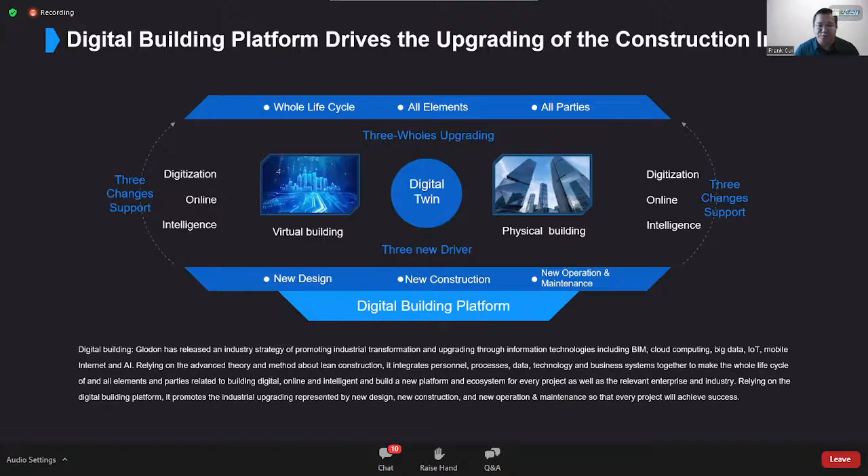And the obvious advantages that the digital building platform can bring to us, we think, are more income, higher speed, better quality, and less cost. Of course, there are also other benefits that we can explore by ourselves. Today, all sectors are talking about digital transformation, no matter if you are a big enterprise or small company. And we all know that digital transformation is inevitable for today's business.

The construction industry is one of the largest industries in the world, but it is still one of the least digitized sectors. We are constantly being considered laggards when it comes to technology adoption. Until today, some of us still insist on some old and very inefficient tools. So we can see the construction industry still has a long journey to digital transformation. What is digital transformation in your understanding?

I think it is the integration of digital technologies into all areas of our business. So it's fundamentally changing how you operate and deliver value to the customers. Of course, it is also a culture change that requires our organizations to continually challenge the current status of the team, to start experimenting, and to get more comfortable with new things and with failures.

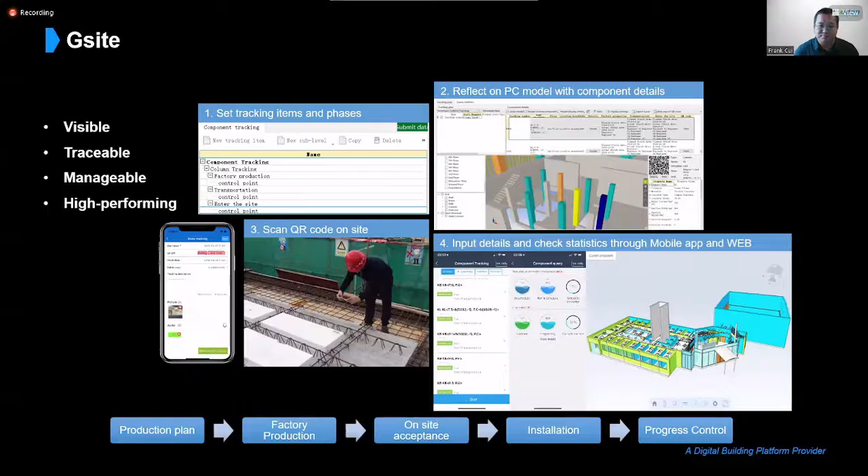And the digitalization is not only for the project modeling, but also for all the elements and activities at the project site, like the people, the machines, the material, the technology, the method, the environmental monitoring. So all the relevant data should be picked up and submitted to the platform. Then after we accumulate enough data, we can have better project coordination and big data analysis, finally to support our top decision making.

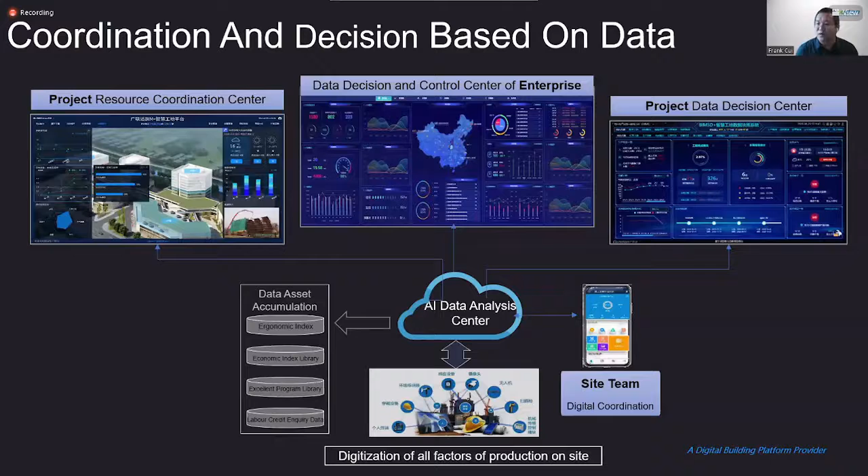In the last part, I want to say, whether we like it or not, technology is changing the construction industry very fast. No one can stop the trend. Our past performance doesn't guarantee our future success. We should stay young for shining things. We should stay young for new technologies. Time is a passage that can separate the adopters and those who won't. The future is not just for the young, but also for young minds. So I want to say, never be late to start or to learn. Never say we are too busy to learn new things.

So start your 5D BIM journey. Maybe it is one small step for our quantity surveyors, but it is really a giant step for our enterprise to stay on top in the fast market competition.

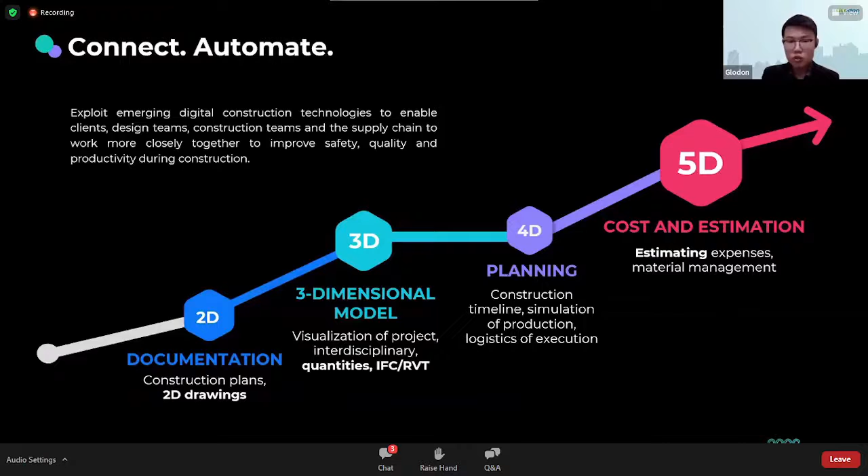So 5D BIM, digital cost management, is about three main things. First is about intelligence, second is about visualization, and third is about interconnection. From 2D to 3D to 4D and finally up to 5D, every stage has its own description. For example, 2D is mainly based on documentation, 3D is more on the three-dimensional model, 4D is planning, and 5D is about cost and estimation. So here in 5D BIM, we will introduce how our software can do costing and estimation.

Now, TAS is the leader of the 5D BIM quantity takeoff era, and its main calculation business is architectural and structure. For the past 10 years, it has been widely praised for its built-in local calculation rules, efficient modeling, and integration of quantity and model.

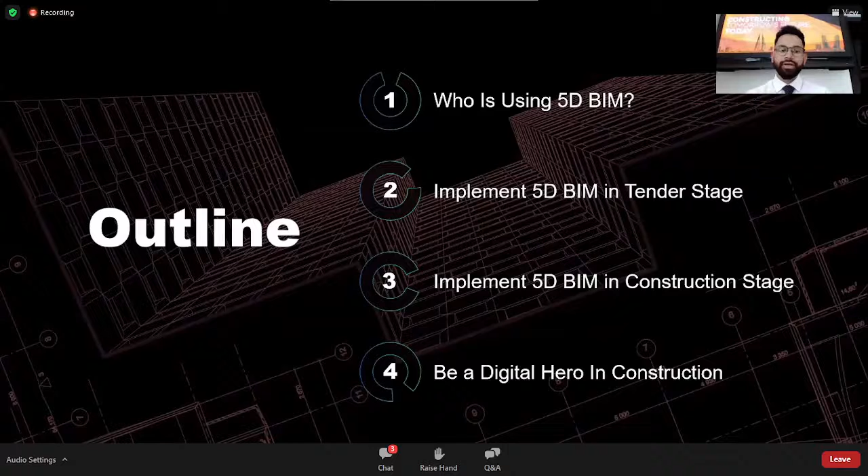So let me start with the objective, a quick rundown of the topics for today's webinar. Let's get started with 5D BIM. So who is using 5D BIM? That's the first topic for today. Then we're going to look at implementation of 5D BIM in tendering stages as well as in the construction stage. Finally, we'll conclude with your opportunity of getting involved and becoming a digital hero in construction.

With that, we move to the second topic for today: implementing 5D BIM in the tender stage. In general, we all seem to be reluctant up to a certain limit when it comes to technology, and we tend to find plenty of reasons for that. But when push comes to shove, we rush for changes. So it's time we identify the areas where disruption is needed and save time for a better outcome.

And then if we have a BIM model already, a Revit or an IFC file, it could be a federated or a single model, all we need to do is import the file, check the element properties, and then we can straightaway proceed to the quantities just by one click to do the calculation. Different types of quantity reports can be produced out of the software, which automatically applies the rules in it in order to generate the quantity reports.

Again, we are leading in the industry when it comes to collaboration and compatibility with different well-known file formats. Autodesk, being our R&D partner, paves the way for us to make sure our product is user-friendly and compatible. So we are certified by Building Smart, which is an international standardization body for Open BIM, and we support popular file formats like Revit BIM model and IFC BIM model, which stands for Industry Foundation Classes, from Building Smart.

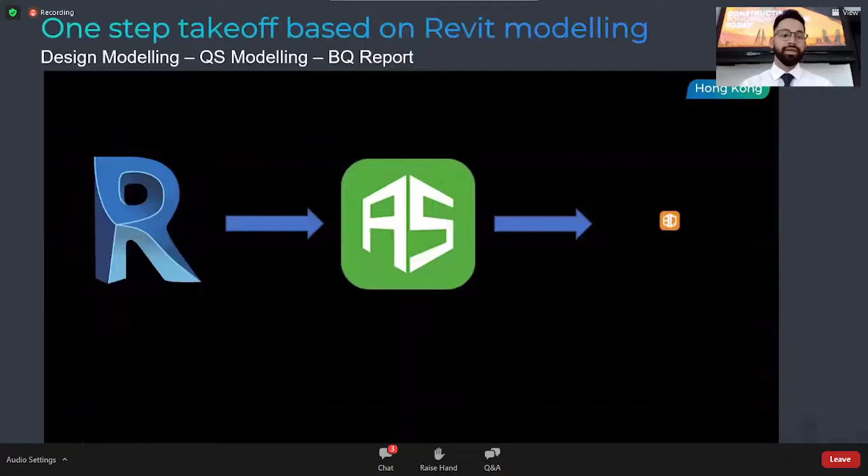non-proprietary file formats like IFC, where we need to ascertain which building elements are mapped for an export. So using a Revit design model, as you can see on the screen, our system provides you with not only the takeoff of all the elements, but also helps in live connecting quantities with the BOQ.

So the Revit model import is quite simple. All you need to do is just go to the BIM model and browse through the local directory and find out the model, and then set up the floor levels. Just make sure that the elements are getting imported with their respective properties. And then we just choose a location to place the model, just in case if you have different models, so you can place them at different locations based on the master plan.

And then we can proceed with having a look at different settings like grade settings. If you'd like to change, for instance, the concrete grade of a particular element, whether it's substructure or superstructure elements, you can do that. And then you can proceed with different other setups there.

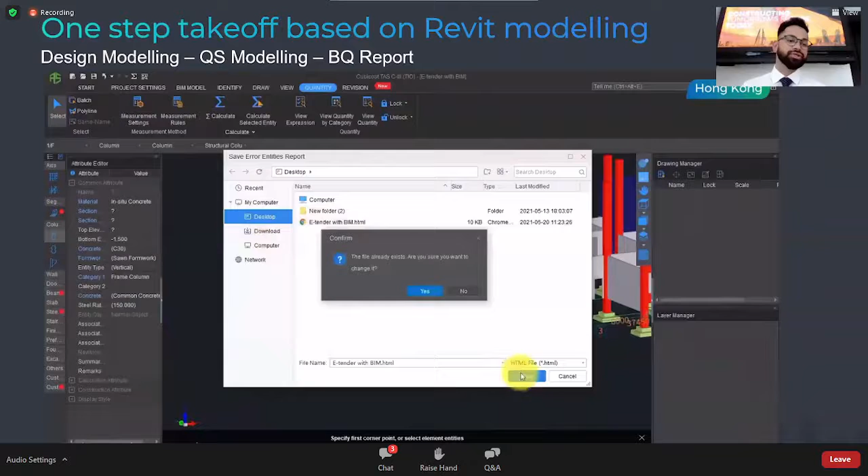When it comes to dealing with errors in a particular model, this is where everything gets interesting, because being a Revit modeler, you may have different kinds of errors with regards to overlapping. In that case, the software actually determines where those errors are and allows you to trim out the extra areas. From the model check result, we can see there are different errors with regards to overlapping or extensions. The software has a powerful function called auto process, by which it trims out the extra layer, and again it asks your permission if you'd like to do that or not. You can set different setups there.

And then we have the quantities right here after doing the calculation. Now, once we have the quantities ready with us, then it's about live linking these quantities with our BOQ. The BOQ is inside a software called TBQ, which is a tender estimation and pricing software.

In TBQ, you can have a built-up BOQ already, or you can import a BOQ, whether it's in Excel or PDF, a scanned PDF. Then, because both the takeoff software and the estimation software are connected together, all you need to do is feed the quantity information to the respective bill item. You can have a reflection of the actual BOQ from TBQ to the takeoff software, as we can see on the screen. And then we can just drag and drop the quantities from the model to the BOQ.

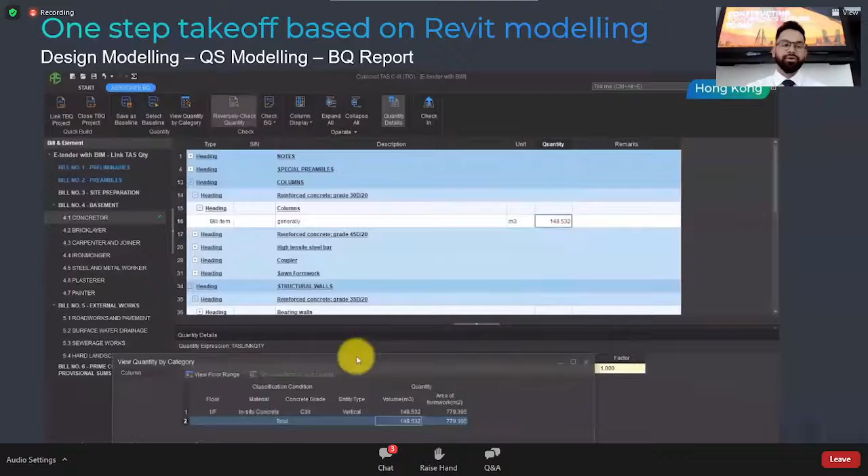As soon as we do that, there's a function for check-in and check-out, which would basically send this information to our estimation software. And if you'd like to apply any factor to any of these quantities to increase the quantity, you can do that. There's a powerful function which is reversely checked, as we saw before. From the BOQ itself, you'll be able to see where exactly the quantities are coming from in the model.

So now that we have the quantities fed into the BOQ, if we switch to our estimation software TBQ and look at the quantities with the details, we can see who as a QS attached that quantity to that bill item and at what time, with every kind of detail. It also shows with a sign that the quantities came from the takeoff software, which is for architecture and structure.

We can also do manual quick calculations and feed them into different bill items, just in case there are some bill items where we have to do manual calculations. We can apply formulas and different functions, just like in Excel, and do some manual typing as well if you'd like to add up some quantities in a particular bill item. All these functions are available, and it's quite flexible when it comes to edits and modifications.

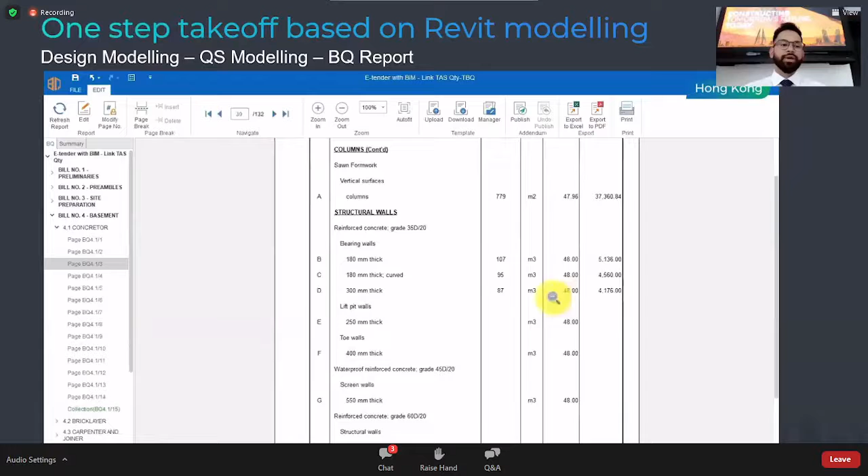And then we get to the actual BOQ preview, where we see that all the quantities we just fed in are actually getting reflected into the actual report. We can put a logo on top if we are a consultant, and provide details into the header and footer, page numbering, and other settings. Finally, when we have the BOQ ready, if we are a contractor, we feed in the rate and the amount is already there, and then we can print directly from here. So now we have the PDF BOQ with all the details in it.

That's from Glodon CubiCost, the whole system of how we connect the quantities with the BOQ and live link both of them. Because the model is connected with the BOQ, when we make any changes in the model, that gets reflected into the BOQ automatically. So that's automated.

All right, so 3D modeling from scan PDF or JPEG file. Inside our CubiCost TAS software, we can quickly create a project and select our rules of measurements. Just by pressing OK, we have created a new project.

First, if you look at the measurement settings and measurement rules, different rules are already built into the software, coming from the method of measurement chosen while initiating the project. Under floor settings, we can set up different levels of a particular building and the grade settings we looked at before.

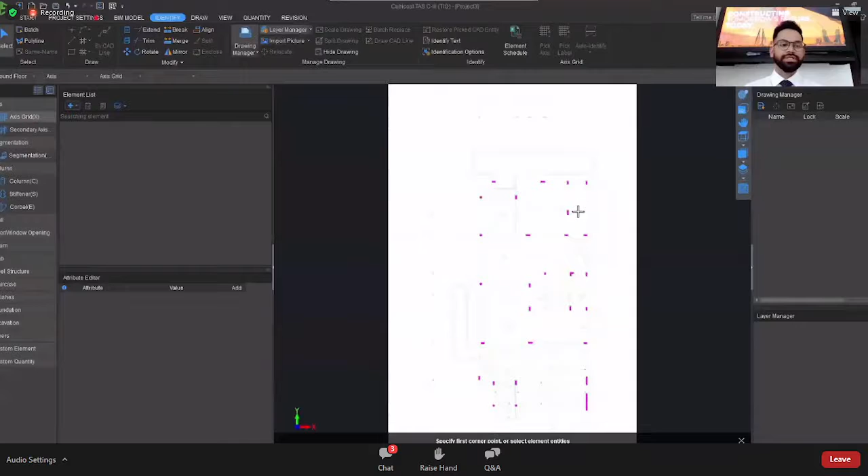Now, if you proceed with any of the file formats mentioned, it could be a picture file or a picture drawing. So if we've imported a JPEG drawing, what we tend to do is scale the drawing first, because for the most part it's not scaled. The scaling process is quite simple.

It's just the same as any other CAD software in the market. If you proceed with the correct scale, then the drawing is pretty much set for building up the BIM model and proceeding with the calculation.

So next, we're going to go ahead with one particular element. Let's say we're just concentrating on column. In this scenario, because we have a picture, not really a good quality picture - bad quality, let's say - of the drawing...

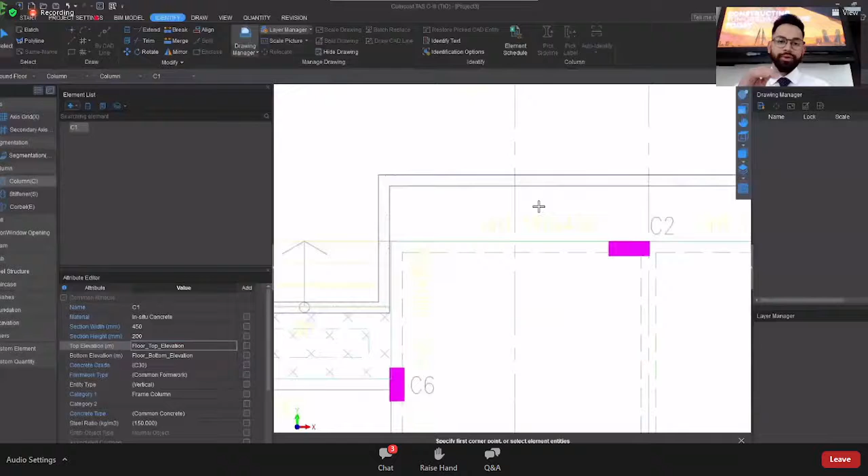What we tend to do is create a particular type of column, let's say C1, and start placing them in their respective positions on the drawing. There are different functions to snap that particular location as well - you can snap the point where the column needs to be placed.

Just to save time, we actually placed the other columns already. So if we proceed with the next element, beam, we can do the same.

We just create a beam, provide some information like its width and height, and then we can directly start placing the beam in its position. It's as simple as dragging that point from the beam from one point to another point, and it just got placed.

So all you need to do is create those types of beams and place them in their respective position. By the way, while we are doing the modeling, in the background the software is making sure all the calculations are getting applied.

So if you press calculate, the calculation result would pop up and be available. To save time, we also did this slab quickly, and here we can see that all the elements of beam, slab, and columns are in place.

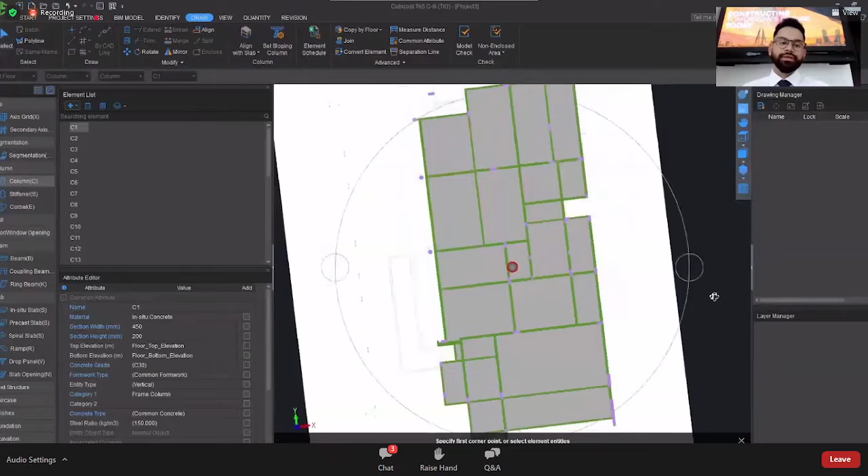So next, we're going to run the quick copy floors function. By doing so, we can copy those floors, which saves a lot of time because for the most part, the structural elements are more or less the same on different floors, except for size changes.

If you'd like to make changes, you can switch to the next floor and make changes there. That's quite user friendly and easier.

Here we can see that on our working space, we don't have any drawing yet. So we're going to import some drawings from our browse directory, and then we have these floor plans here. We're going to let the software do an auto identification of elements from the 2D drawing and build up the BIM model for us. We just split the part of the drawing that we'd like to use for the first BIM modeling.

We can split out the drawings as many times as we want, depending on which part of the drawing we are using, or depending on the floors that we are working at. And then the function of auto identification is right here. So all we need to do is just perform 3 simple steps.

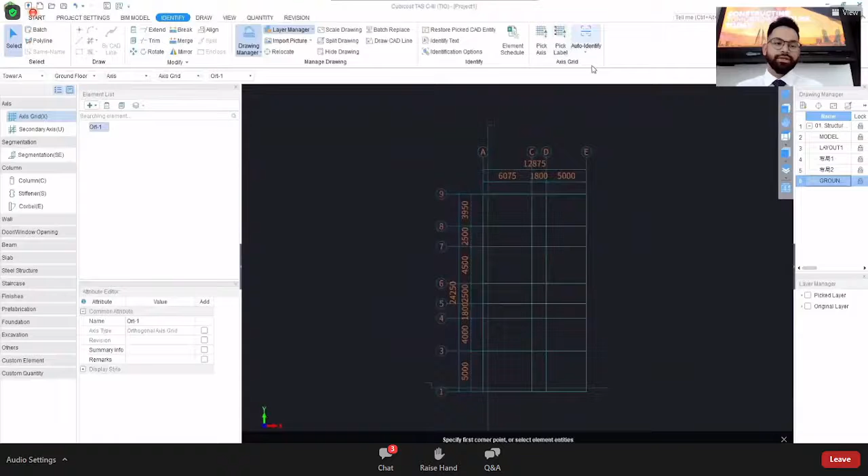We pick the sideline of the particular element that we are identifying. So here, for instance, we are identifying the axis grid. So we just picked up the axis grid and the level of axis grid, and by the auto identification function, here is our axis grid in place. So by 3 simple steps, we can generate any of the elements that we want.

For instance, here, if we just proceed with one of the structural elements like column identification, we're gonna have a look at how the software automatically identifies the 2D lines and builds up the 3D model for us and does the calculations for us as well. So over here, we can see that there are different functions, but 3 particular functions that we'll be using just like before.

So you're gonna go ahead and select the column, and then we proceed with the first step, which is picking up the sideline of the column. Then we proceed with the next step, which is picking up the tags or levels of those columns, and then proceed to the third step, which is just auto identify. Now, what happened along with this process is that the software identified the 2D lines and built up the 3D model from there.

So these are the columns in place, as we can see. So from the 2D drawing, whether it's a CAD drawing or a vector PDF drawing, the software would identify those 2D lines and build up the 3D model for us for any kind of elements. So now that we have our column, if we proceed to a couple more elements like beam and slab, it's just the same 3 simple steps.

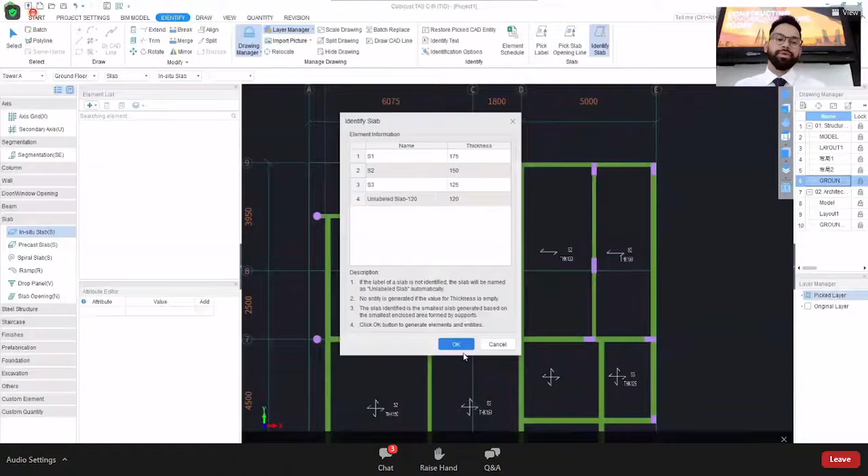And for slab, you have the option of selecting a particular type of slab that you would like to place, or you can make changes with respect to their names or their thicknesses. So over here we can see that these are the thicknesses that can be changed, or we can proceed with. So we have the column, we have the beam, we have the slab in place at the moment. All right, so that's pretty much the 3 structural elements that we just looked at.

Now if we proceed to the wall for an architectural element, we can again perform the 3 simple steps, picking up the sideline of whether it's a masonry wall or a concrete wall. So we are proceeding with the masonry wall sideline. We don't have a label for that, but we picked up the doors and windows for walls to make sure that the software knows where the openings are. And then we proceeded with auto identification. And look what happened. We have the wall in place now. So this is the 3D view of our wall.

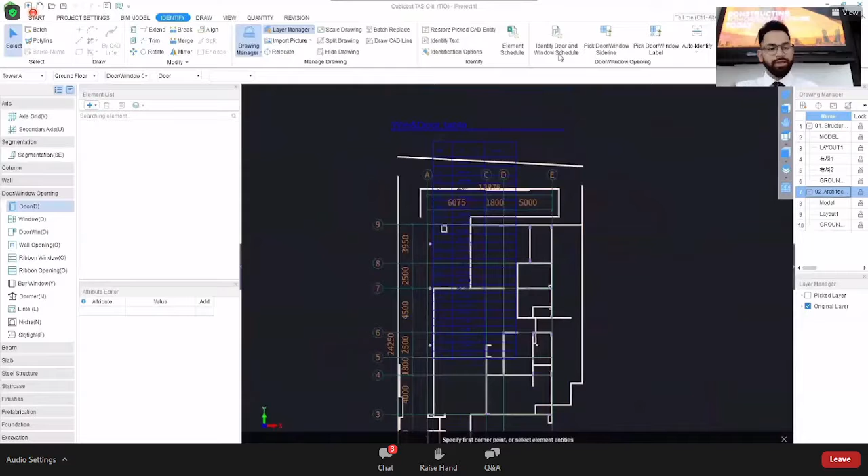Now, if you go for some openings on the wall, for instance, the door, this software again pulls in information from an Excel file, from a PDF file, a schedule of doors and windows, or from the CAD drawing itself, if you have a schedule inside of the CAD drawing. So here we just picked up a schedule of doors and windows from the CAD drawing, and the software is pulling in all this information, providing the headings that we have selected, or it automatically identified. And now we can see the identification is done.

Just in 2 simple steps, we have all the doors and windows listed with their respective sizes and properties from the schedule. Now all we need to do is just identify the levels of those doors and windows, so the software knows their position from our previous step. Now, if you proceed with auto identification, the software identifies those openings of doors and windows and places them in their position with their respective sizes.

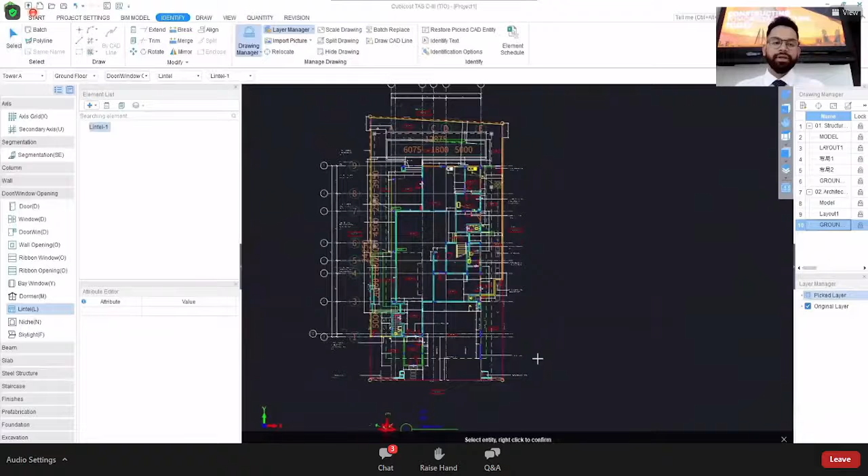Really, really powerful tool. And then if we go ahead with structural elements like lintel, there is quite an intelligent function of auto identification, which automatically places the lintels in their respective positions. Let's have a look at that. So we proceed with some properties like width and length and the extension that you want on each side of the lintel. And then all we need to do is just select the entire drawing and right click for confirmation for that particular set of conditions.

And the software would place that particular lintel that we created on the top of all the openings out there. So it is a matter of just selecting the drawing and pressing OK.

So we will just proceed with the basic functions, which are like providing information related to the riser and tread, and the thickness of landing and width of landing. And then the software knows how the model should look like. All you need to do is just trace the positions of the steps by simple clicks, and the software is going to place the steps in their respective position.

But what's interesting to look at is the software actually creates the landing automatically. The shape of the landing and how far it should cover depends on the properties that you have provided before. But the mid landing and the floor landing are being created by the software. So it's really, really intelligent function there.

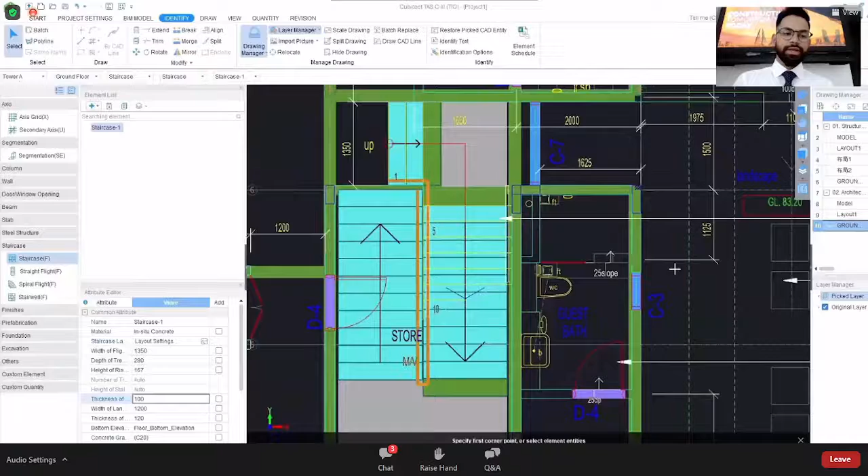And once you're done with that, you can actually edit that particular staircase if you'd like to have some sort of shape on the corner. And if you'd like to change some of these elements' shape, like if you'd like to provide some more railings as an example. So we just select, okay, we would like to have railings on all the sides. If you'd like to get rid of the beams or change the size of beams, all this information is available inside of that function.

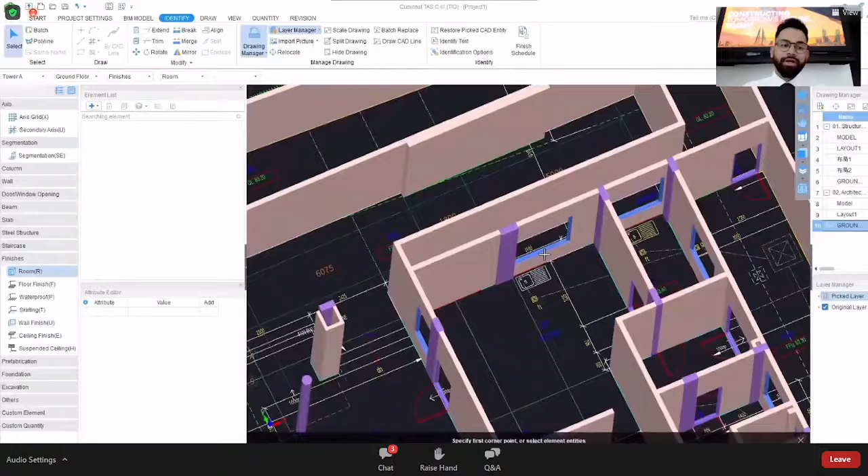Now, if we proceed with the finishes, we go to our different rooms, and there is this particular function in the software where we have just selected the room. What the software does is that it takes care of every kind of finishes that should be applied to a particular room. So now, all you need to do is, for a particular room, you assign the wall finishes, you assign the skirting, you assign the floor finishes, the ceiling, and it takes care of all the edges in the corner of, let's say, the beam or column, which is coming along with wall. If there's a wall opening, the software would consider that and deduct that area in terms of the wall finishes.

Now, in this particular case, we're going to import a schedule of finishes. If you have it in Excel, if you have it in CAD or in PDF, we can deal with every kind of format. So now you can go ahead and just select that particular file of schedule of finishes. Now we are using here an Excel file. And as you can see, on the top we have the heading. So we tend to get rid of some of those.

You can delete the row, you can delete the column if they are not useful. And then you just have to make sure that all the finishes are in place with respect to their heading, so the software knows exactly which finishes are getting imported. Now, if you press identify, the software identifies all the finishes with their respective rooms. So you can see that different rooms got imported, and with their rooms on the right side, we can see that the attached finishes are also there. So these all attached finishes got imported from the Excel schedule of finishes that we have.

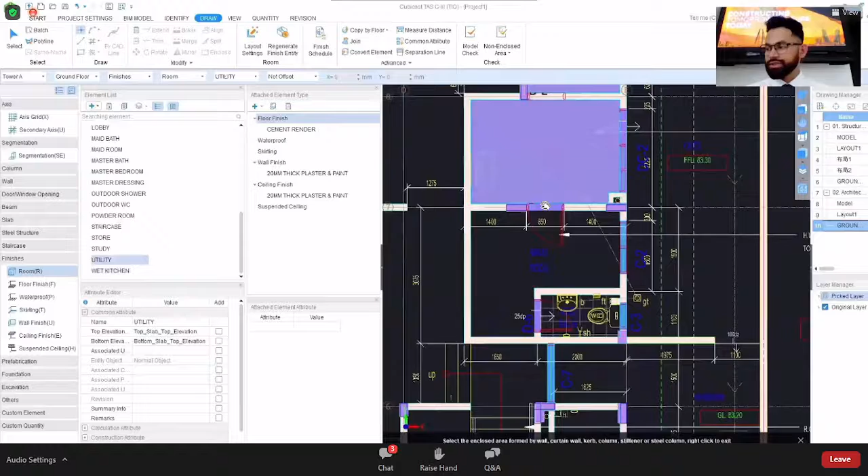Now it's a matter of just clicking on different rooms to apply those finishes. Just in one click, the software is going to place all of these finishes for a particular room in that particular room. So let's have a look. So we just click here, and that is it. It's been applied there. Now, if we go to the next room, we just switch to the next room, which is our maid room. We then go to maid room, place it there. We have then maid toilet, so we're going to go ahead and do that as well.

Now, if we turn it into 3D view, what to see and check is the placement of those finishes, and you can see that the wall finishes considered all the sides and edges and openings, and then you have the skirting right there, and then you have the floor finishes.

Now, let's have a look at a non-enclosed area. The previous function was applicable for the enclosed area, which is enclosed by a wall. But if you have a non-enclosed area and you try to apply the finishes, you can see that it goes beyond the line that you want. Let's say we just want to apply finishes for this particular room.

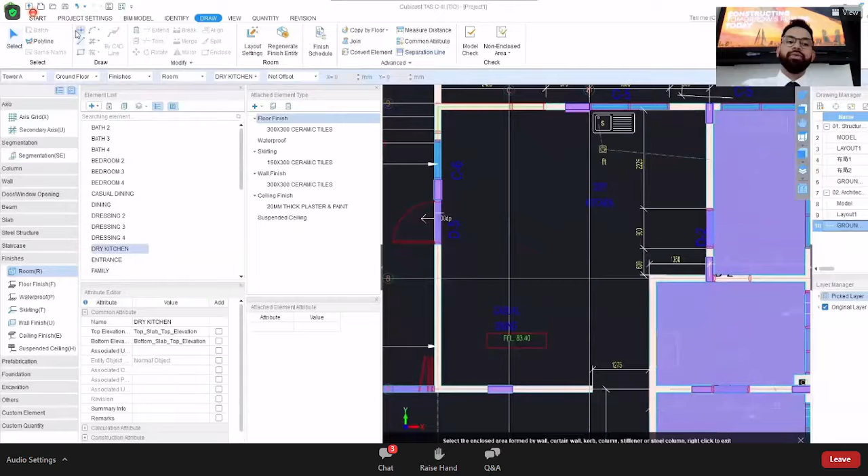So there is a really, really useful tool, which is separation line. What it does is that it creates an invisible boundary, which doesn't have any quantity in it, but it makes sure that the areas are separated now. So we can apply a particular set of, or just one type of finishes in one particular area, and then we can apply another set of finishes on another side.

As you can see, I just applied for this particular area, the dry kitchen, and you can see that this is the result. But for this area, we're going to go ahead and place another type of finishes as an example. So this is how we can actually separate our finishes. We can place different finishes at different positions. And more so, we can actually deal with different shapes and sizes. We can split those items and create different other shapes as well.

Okay, so now let's have a look at the collaboration when it comes to modeling. Now, we're going to have a look at how to copy entities to different areas and different floors. If you'd like to copy some of these elements to different locations, providing that two buildings are similar, how are we going to do that? Or if you would like to just place it in the opposite direction, how do we deal with all of these rotate functions and copy functions in the 3D model?

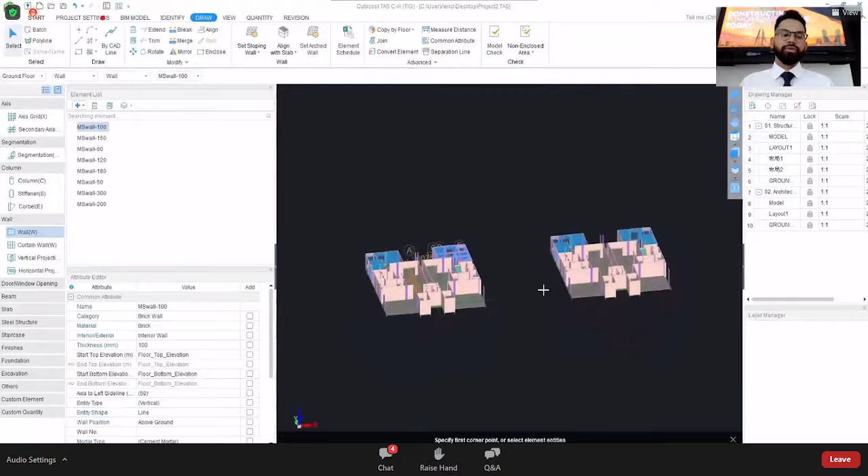So you can directly copy and paste the elements, all of them, to another part. And this is how we copy the entities of this particular model. And then if you would like to copy it into another place also, it's all about just copy and paste. And then you have the ground floor, looks quite a huge building, two buildings right next to each other of the same shape, just by copying these elements from one place to another.

Now what we're gonna do is copy all the elements of this particular floor, the ground floor, to different other floors. In this particular example, we're just considering that these floors are typical floors. So what the software is doing is basically copying all the elements that we have modeled so far on ground floor to all other floors that we have. But as I mentioned before, we can switch to different other floors and make changes as required.

If we just look at the whole building, just to have a 3D view of it, you can see that all these works can be done very quickly if you have typical floors. But even if you have different other shapes or sizes, you can make changes by switching different floors. All right, so we looked at the modeling part.

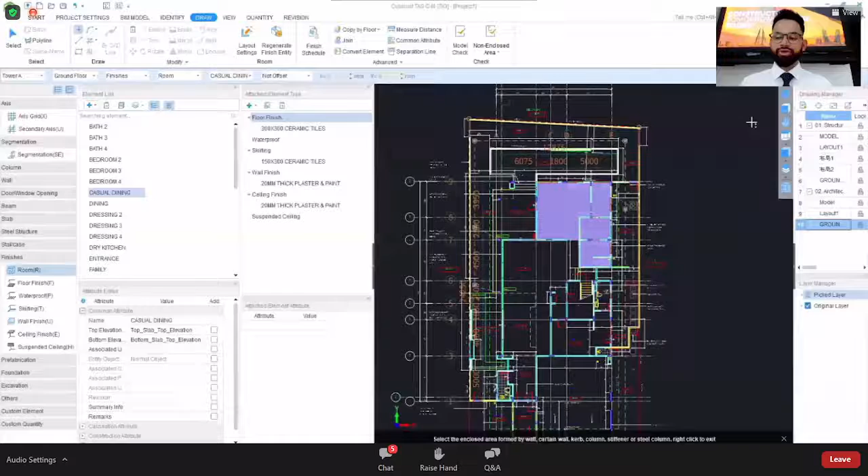Now let's proceed with the quantification of different elements and how we extract the quantities and produce some reports out of it. Before we move to the quantities and reports, we have to proceed with calculations. So we're going to do the calculations very quickly. How it works is that it basically follows the same principle as I mentioned before. Depending on the measurement settings, the software is going to calculate and apply those rules with regards to which quantity supersedes which when it comes to deductions, for instance.

So over here, if you just press calculate, the software would calculate, whether you'd like to do the calculation for a floor or the whole building. You can get it done. And then we have the quantity view option, which is view quantity by category. Over here, we can see a complete set of customizable catalogs available on the left side, which allows us to categorize quantities with different conditions, different filter options, division, etc. Selecting the conditions or calculations that we want, we can directly export it into Excel. As we can see, the function is available there.

Then when it comes to looking through all of these different quantities, as an example, in a particular case, if you did the calculation, then you're going through the quantities, and it's a little bit trickier to understand which quantity is exactly from where.

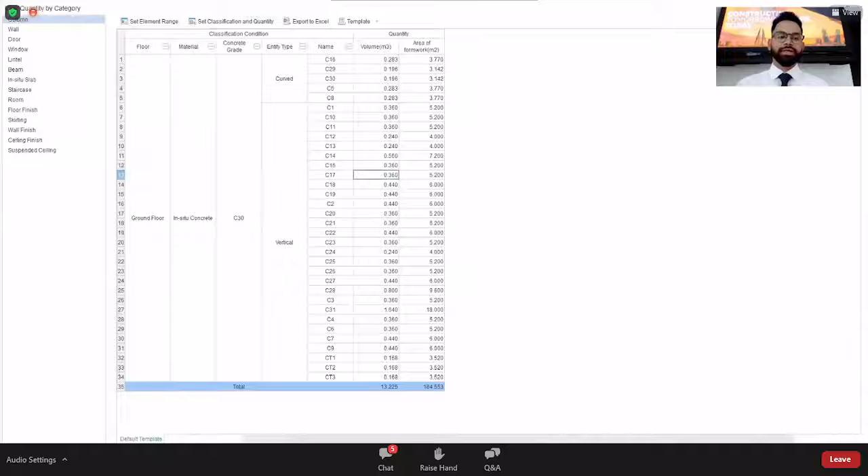So there is a really useful tool available, which is the reversely check function. What it does is that you just select a quantity and press reversely check, and it takes you back to the model and shows you exactly where that particular quantity came from. Let's say we selected another column quantity here, press reversely check, and here it is.

And then we have another function to check the calculation result, or how the calculation took place inside of the software. That is the view expression function, which breaks it down to the calculation of length, area, volume with various details and their numerical values. So you can actually see every detail of the calculation that happened inside of the software. And if you'd like to make any kind of changes, you are always free to do that by going back to the measurement settings and changing the settings.

Now, if you select a wall, what's interesting to notice here is that it not only gives you the breakdown of the calculation, but also allows you to have a visual confirmation of the calculation that is happening. It's useful for documentation or visual presentation purposes.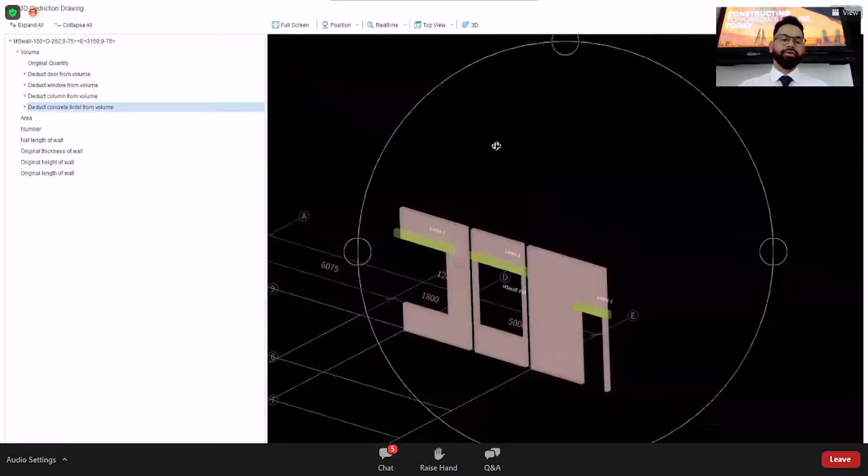At this point, you can see that this is the whole quantity of wall. There's a deduction for doors, deductions for windows, and there are deductions for lintels as well. So by all of these deductions, the software arrived at a point where it calculated quantities for just this shape. And these are the quantities that we just saw inside of our report.

All right, so this slide in particular looks at a complete interconnected quantity takeoff and cost estimation platform provided by CubiCost. To get an overview of how the complete system works, we can see on the left side three takeoff tools: TAS, which stands for takeoff architecture and structure; TRB, which is for rebar, which is what we're going to look at now; and TME, which is for MEP, which we will look at in a while. These tools do the quantification using the BIM model, as we saw, and then produce the quantities.

And what we tend to do is connect both the estimation and takeoff software together in order to produce the BIM costing part, which is again connected to the e-tender platform. Tendering, evaluation, receiving tenders, doing comparison, finalizing bids, and all of these different activities can be done in the e-tender platform, which is connected with the BOQ of CubiCost.

Okay, so let's proceed with TRB, which stands for takeoff for rebar. Over here, we will be looking at 3D modeling, which can be shared between TAS and TRB. In other words, the model that we have just built up in TAS, we're going to use in TRB. On the screen, we are looking at the TAS software. We have built up this BIM model. We can export the model, and there is a native format within CubiCost called Qubit format, by which the software allows you to share the model within the CubiCost suite: TAS, TRB or TME.

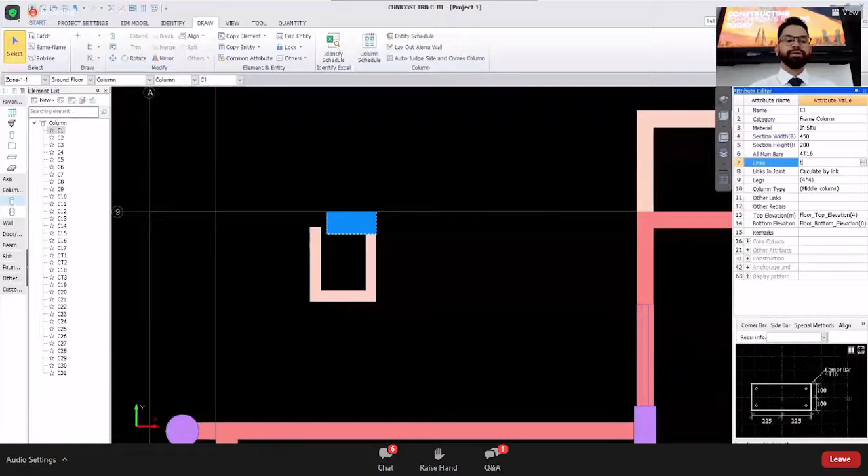All we need to do is select the type of column, let's see C1 as an example here. You can simply manually put in the main bar information, the stirrups information, and if there are links, all of these different bar information can be directly input in the properties, and just run the calculation and get the result. And you can see the visual representation of the rebar and how they are arranged for a particular element. So we did that for one column.

In many cases, you have the same type of rebar information for different columns. So there is a function for synchronization as well. You can synchronize the same information over to different other columns as well. Now, if we proceed with beam, there are different approaches available within the software, including the manual one.

But then we have a really, really short method, which is the beam rebar information schedule. If we have that schedule, then we import that particular schedule, and the software would identify all this information. In other words, it will pull in that information from the schedule. The schedule could be in CAD format or in Excel format, as I mentioned before.

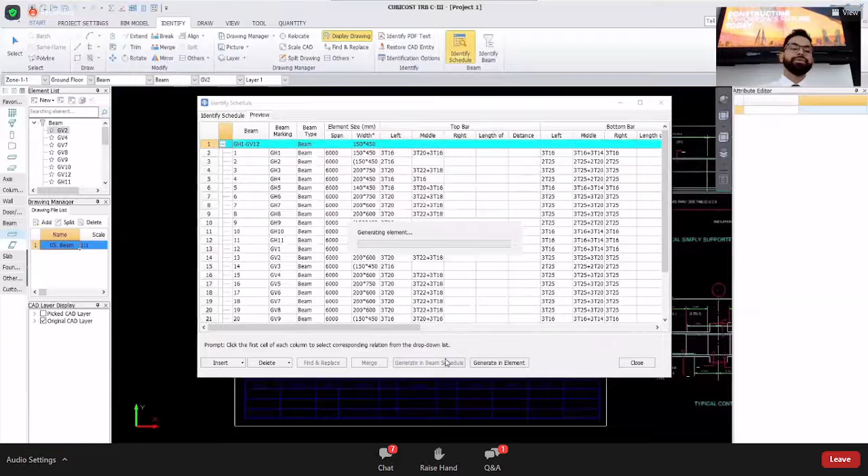And then over here, you can select which column represents which rebar. So we're looking at the top bar, the bottom bar, the side bars, and the stirrups and the links. Once that's been done, we can just proceed with identification by simply clicking on generate a beam schedule. The software is going to identify all this information, and it will build up a beam schedule within the software.

So now we can see the details of different beam rebars with regards to their calculations as well on the top. And then this whole setup can be synchronized to our BIM model. As soon as we press the synchronization button, as you can see by pressing on generate beam, it's going to feed in all the rebar information inside of our beams.

Now, all we need to do is just run the calculation and have a look at the 3D view. We can see the placement of rebars, the side bars, the top bar and bottom bar with their stirrups, and the conditions of stirrups placement in their position.

And you can see in the text view there are different details, and there is rebar information with their respective shape and their bend length and everything in detail, which is quite useful for the bar bending schedule that we can produce as a report from here. And then you have the details of calculation, the calculation formulas which have been applied there.

And if we proceed to the report, as I mentioned just now, you have the rebar schedule here, which works pretty well for us to proceed with ordering materials or future activities. Various details are available with regards to the cutting length, bending length, and everything within that bar bending schedule or the rebar schedule.

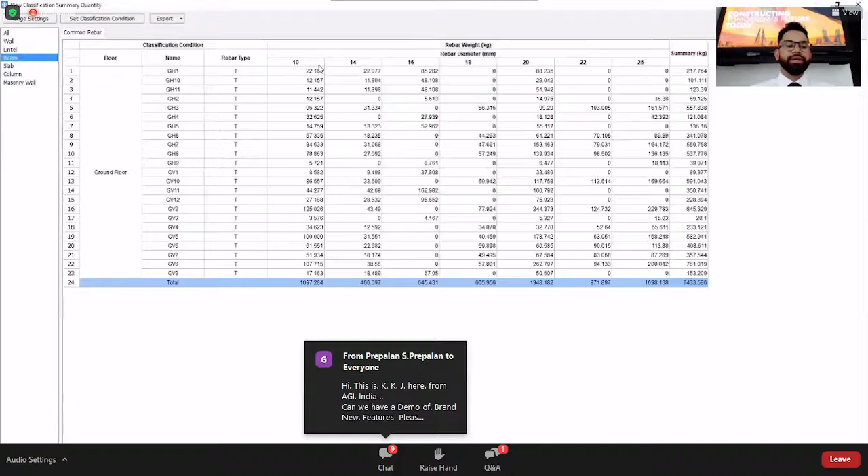If we proceed with the classification summary, we can see for different elements like wall, lintel, beam, slab, column, the quantities which have been calculated by the software. We can see that the rebar information is set quite well with different rebar sizes and the summary calculated result as well. So that's the total that we can see over there, and you can export it into Excel format as well.

So that's pretty much the rebar information that we can obtain, produce different reports, proceed with the calculation, providing that we have the BIM model, or we can generate a BIM model inside of the software as well. Now, if we look at the calculation rules, because this is the question that we all may have in our head, like how the calculations are happening, how do we get to see them?

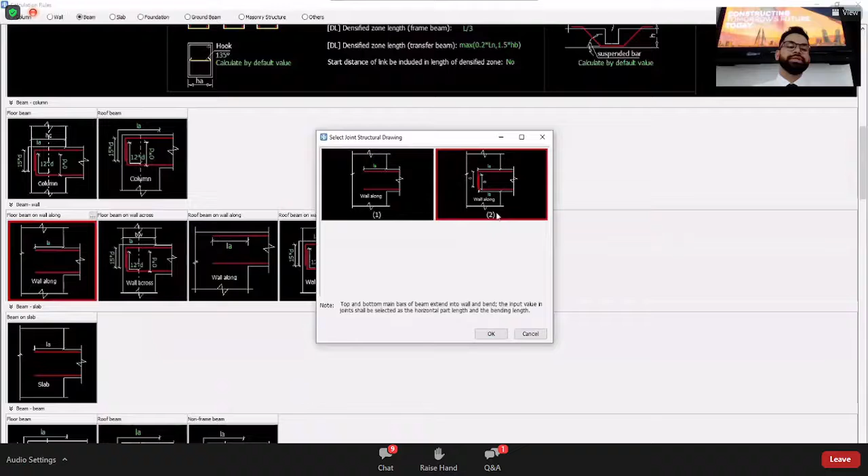So you can see that there are different calculation rules which have been set up already inside of the software, and it's quite flexible with regards to changes. This is coming from the region-based standards that you're using. The green color information that we see here is editable. So for each individual bending or lapping or hook length, stirrups, whatever conditions you would like to feed in with regards to calculation, you can make changes from there itself.

So as an example, for this particular element, in plan view of the end of our bottom of wall rebar, we can change that value to, let's say, a fixed value of 100, instead of applying a particular formula. Once you make the changes, you can see that it turned into a yellow color window, which means that we made changes there. And you can export it or import a new calculation formula for your future use as well. That's quite useful when it comes to using similar calculation rules for different projects.

With that, I'm going to conclude my part of the presentation. The reason for starting with multiple interconnected tools is to draw your attention to how collaborative the whole system is, and to contemplate that.

As a matter of fact, we can utilize all these functions of 3D BIM modeling or 2D tools available inside the software for our quantity takeoff and cost estimation in a common platform.

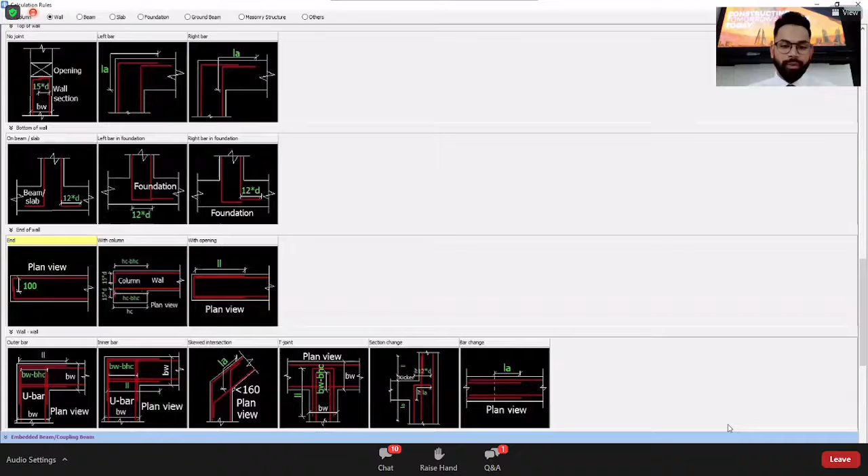From here on, I'm going to take over and we will continue to talk about TME, the software to take off quantities for mechanical and engineering. There are a few trades we have in the software. First is ACMV, which includes all the ducting, grilles, diffusers, and piping. For electrical, we have lighting, switch and socket, tray, trunking, etc. The last one is plumbing and sanitary. Currently in TMEC we have these three trades. In the future, probably by the end of this year, we will include other services such as firefighting.

So how do we model MEP components in our software? Right here we are going to show you how the software works. The first thing we need to do is select the major that we need, for example plumbing, sanitary, electrical, or ACMV.

Once the project has loaded, you will enter this interface. The next thing we need to do is go to our floor settings. Here we can add different areas or zones according to our drawing or project, and add as many floors as we want and change the floor height.

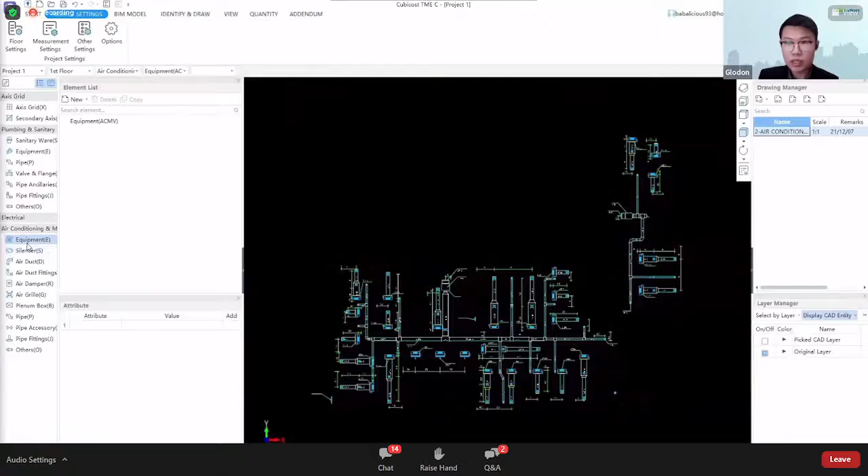Once we have done this step, we can proceed to identify our items. Let's try with our equipment first. From here we can try to identify our equipment using this function. We first pick the device, select the legend of the equipment, and do not miss out any information.

Once we have confirmed the legend, we can pick the system text as well, so the software knows which text is for the equipment. Then with just a few clicks, you can see the software has already identified a few dozen of the equipment. Then we just click Auto Identify, and the software has finished identifying all of the equipment with a similar legend on this drawing.

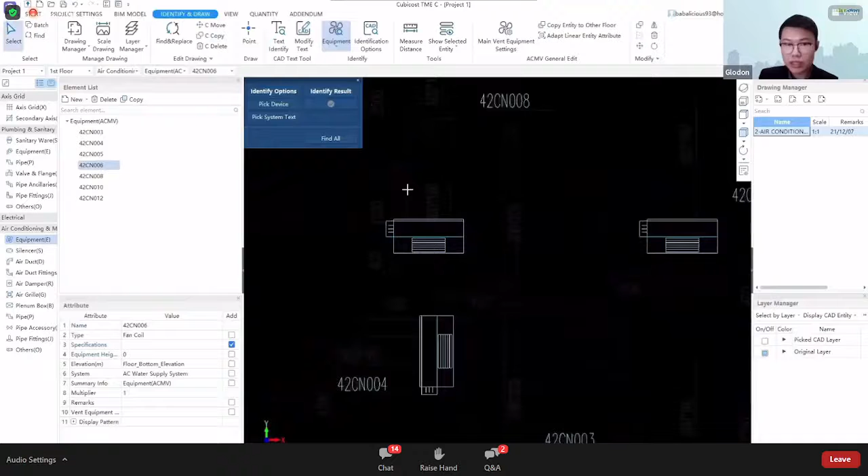Maybe some of us want to double check if we have identified everything correctly. In our software we have a function called brightness, and we can adjust it at the bottom here. From here it is very easy to double check if the items have been identified clearly or not. As you can see, all of these are the equipment we have identified so far.

Okay, so let's try the next one. Let's try to identify some air grills. I'm going to switch back the brightness of the drawing. From here you can see we have different sizes of air grill, one bigger and another with a smaller size.

I'm going to go to my air grill element and create the attribute editor for both of them. Let's take, for instance, this is AG1 and AG2, and I'm going to change different colors for each of them. Now I'm going to click device, then same thing, pick the legend, then click on identify, and you can see the software has identified 39 air grills in this drawing.

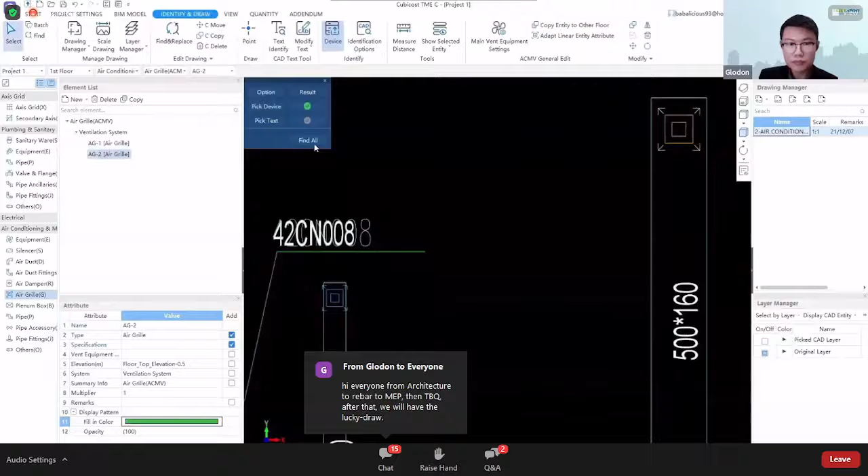So I'm going to do the same for the other air grill. Again, with just a few clicks, we have finished identifying both sizes of this air grill.

Now the next thing we need to identify here should be air duct. Let's click on air duct, and there are a few ways to identify the air ducts. The first one is by using a double line, which is fairly straightforward. We just need to select the labels and both of the lines, then we can get the air ducts.

You can see there are also two red lines here. These are the supports which hold all of the air ducts together on top of the ceiling.

From here you can also see there is an orange item right here. I'm going to show you in 3D. The software has automatically generated this fitting because first we identified the equipment. Once the software detects that we have an item on top, it will automatically generate the vertical air duct to connect them together. The software is quite intelligent.

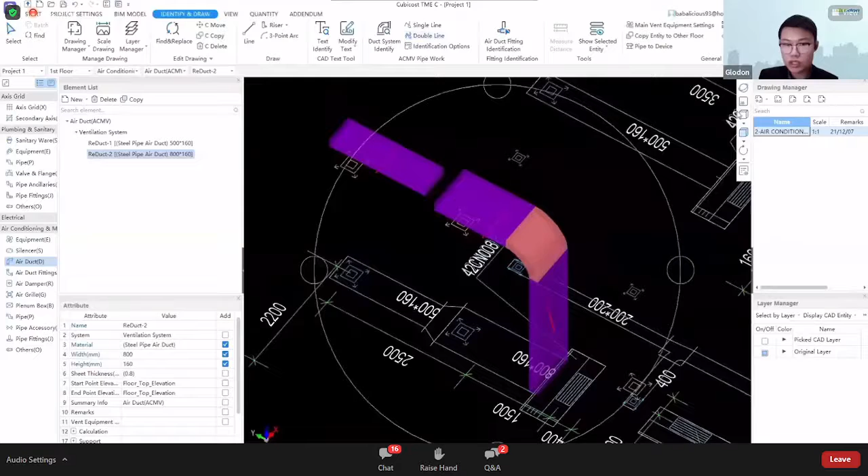Next I'm going to show you how to connect these two air ducts together. We have a function here called air duct fitting. We just select all of the air duct and it will create the fittings here. Now let's try another function.

The other function is called duct system identify. This will allow us to identify the whole system in one go. For example, I select the label here and both lines, and here we can choose which system this air duct is. Once I've chosen the air duct system, I just click OK, and as long as this air duct is connected, all of the air ducts here will be identified together. As you can see, all of these are identified.

To finish with the fittings, again we're going to use the function. Just proceed, and here you can see all of the fittings have been generated.

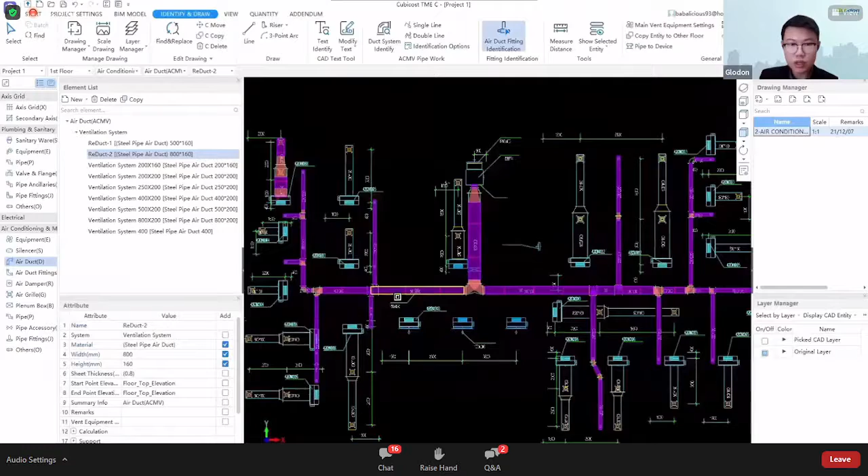Now let's try to do some piping. We understand that there are cases where some pipings are very complicated. Here first we are going to show you the simple ones. If you have piping lines here, you just need to click on the lines of your drawings and it will generate the piping. The second method is by using the line function.

The line function is a bit more flexible, I would say. Let's say, for example, I'm going to draw the piping from one point to another, and assume that from this point onwards the piping is going to go to a different elevation. So here we are going to type in 0.5, and it is going to go up by 0.5 meter, to the other point, and then maybe from this point onwards we are going to have a drop in elevation.

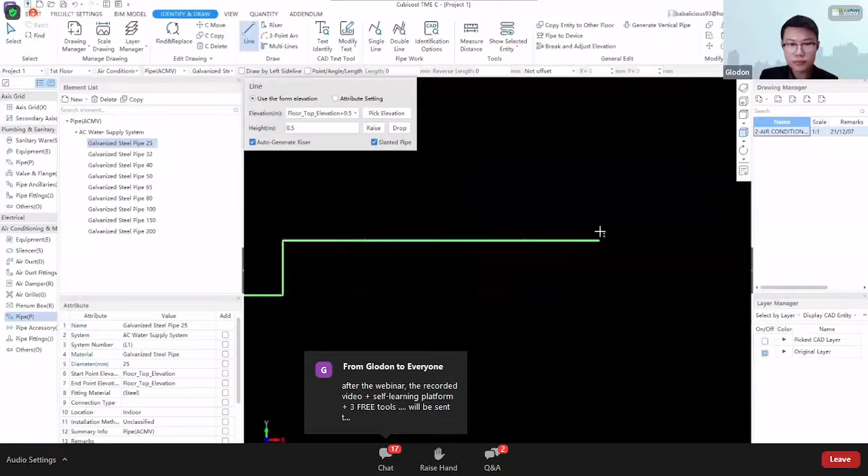And maybe from here onwards we might have a slanted pipe, so we can just tick on the slanted pipe. We can also change the elevation again. Once we have finished the piping, you can view it in 3D again, and we can see we can also produce complicated designs such as these.

Now on to the next part. Once we have finished our modeling, the next part is about calculation. Once we click on calculate, the software will calculate all of the model that we have created so far. Under the view quantity by category, it will show all of the quantities that we have. So let's say, for example, this is for the cables - how long is the wiring, what is the specification of the wire, and which floor they are at, etc.

So let's try to view others as well. We can go back to our ACMV, and you can see all of the name, floors, and quantities. Again we're going to change back to air grille as well, and you can see all of the quantities here for everything that you have created so far. If you want to export the quantities, you can just click on export to Excel, and then it will be exported.

Now the next thing I want to show you is about how to check our quantities. Let's say if your manager asks you how you got this quantity - you can just double click on the quantities here, and it will directly bring you to the location of those quantities or entities. As you can see, I'm going to just click one by one, and it will bring us to the location.

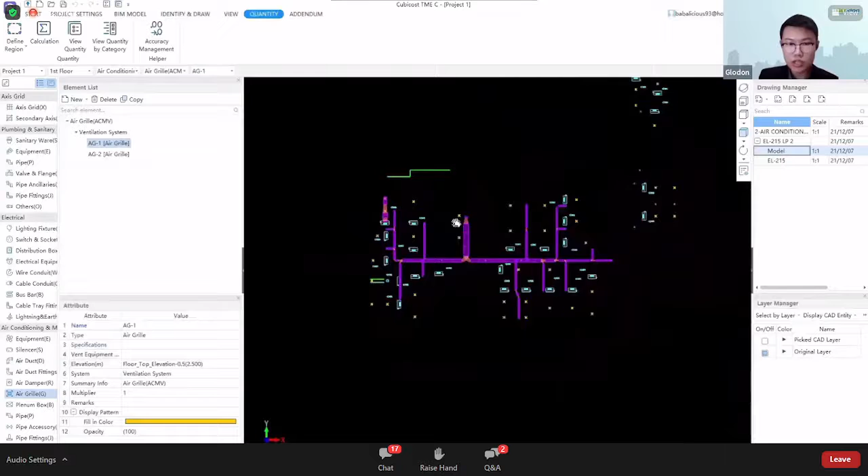The next part is about region. In some cases, we might need to separate the quantities between different regions.

Here we can use the define region function, and then we can use line or rectangular to draw the area, and then rename it, whether this is room number 1, let's say. Then maybe we have a second room, and we can just draw the area again.

Basically what this does is help us separate the quantities. Then we just calculate the model again and go back to our report. From here, we customize or change what we want to view. Since we have switched on the region, you can see which quantities are under room 1, room 2, and those non-regions are the quantities not included in any region yet.

So that concludes for TME.

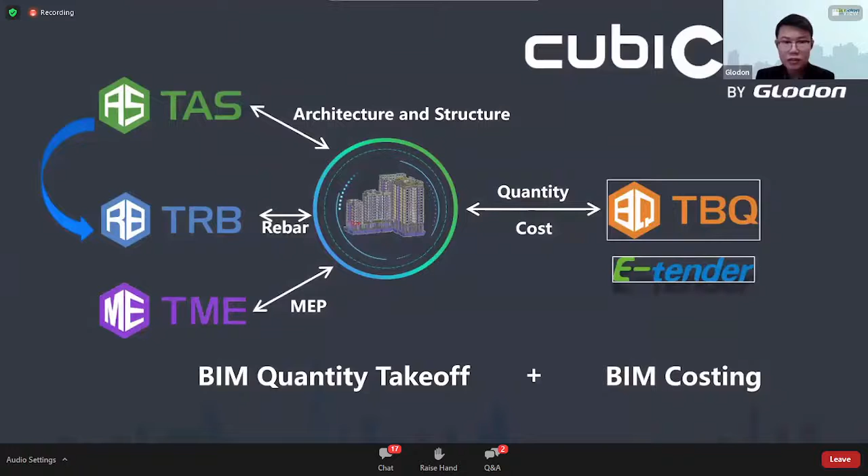The next one that we are going to talk about will be for TBQ and eTender. So what is TBQ? TBQ is mainly about how consultants can prepare bill of quantities with our software, and then they can send the soft copy to the contractors to do electronic tenders.

From here, contractors can prepare all of their unit prices in the price library provided in our software. Once they have finished their tender submission, they can send them back to the consultants, and from here consultants can use eTender to do evaluation.

So from here we will show you how TBQ works. Basically, we can create our own project first - let's say you are the consultants. Once you have created your project, you can create your own TBQ project here. For example, you can add any bills, any items or sub-items that you want, then key in all of your descriptions, your unit, quantities, etc.

Once you have created all of these, you can send the files to the contractors, and the contractors can use our software to identify it, whether in form of PDF or even Excel. We are going to try to identify a PDF copy, so let's say all of the pages we have here.

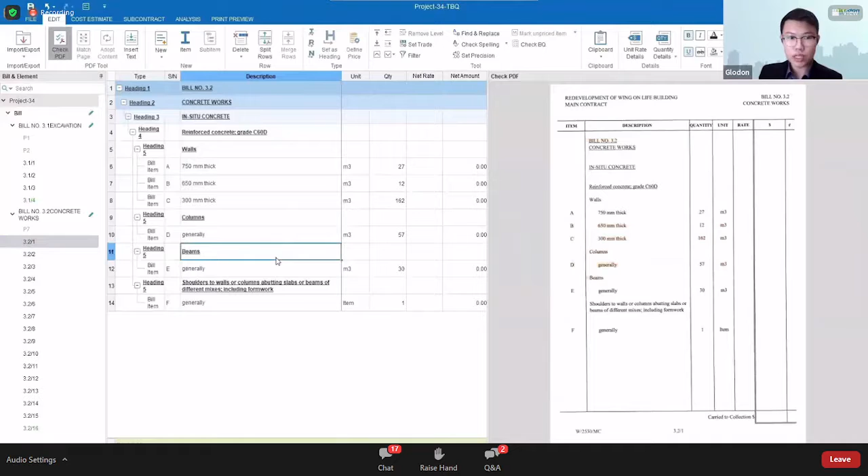Once you click identify, the software will identify everything and convert all of this information into the software. For example, you can check all of the descriptions, all of the unit, or even rate. Here you can click to double check, and as you can see, all of these are properly identified.

The next thing we can show is how to link the quantity in our TAS project into TBQ. So we're going to open back our TAS project. We can click on the BQ tab here and click Link TBQ Project.

Then we just need to log into our account, and you can open the project that you have created in TBQ. Currently the quantities here are locked. We just need to close our TBQ first, come back to our software, and then we can do the quantity linking.

So let's say I'm going to close this project. Then we can come back to our model here, open the report, and do the quantity linking. From here, we just need to click on View Quantity by Category.

Then we can just click on those quantities, click and drag, and it will be connected to our TBQ. You can just repeat this for all of the quantities that you have into the TBQ directly.

Once you have done with all of the quantity linking, we can go back to our TBQ software. And from here, you can see that the quantities have been linked. You can also see that there is a very small icon stating that this is TAS, meaning it is the quantities linked from the TAS model.

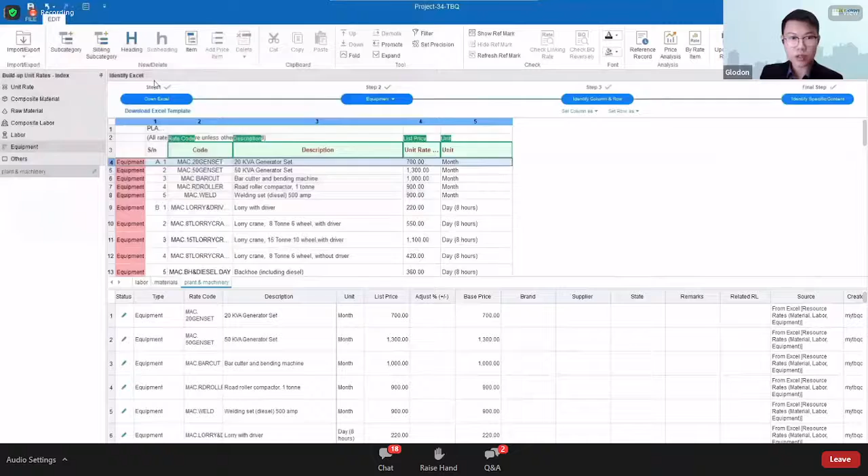Once you have identified all of this information, you can double check from here. All of the quantities, all of the unit rates have been transferred into the software. So from here, we can continue to do our costing. We can just select the rate code which we have prepared in the build-up unit rates. Then all of the net rates will come in automatically.

So let's say that for our bills, we have a lot of items, right? We have walls, columns, beams, etc. We can actually make the process a lot easier by using the filter function. Let's say we are going to search for wall. Once you search for wall, the bill will filter all of the wall elements. So you just need to filter that. Then we can proceed to key in the rate code, and then we can just drag this rate code to all of your walls. So you can do costing directly here, efficiently and accurately.

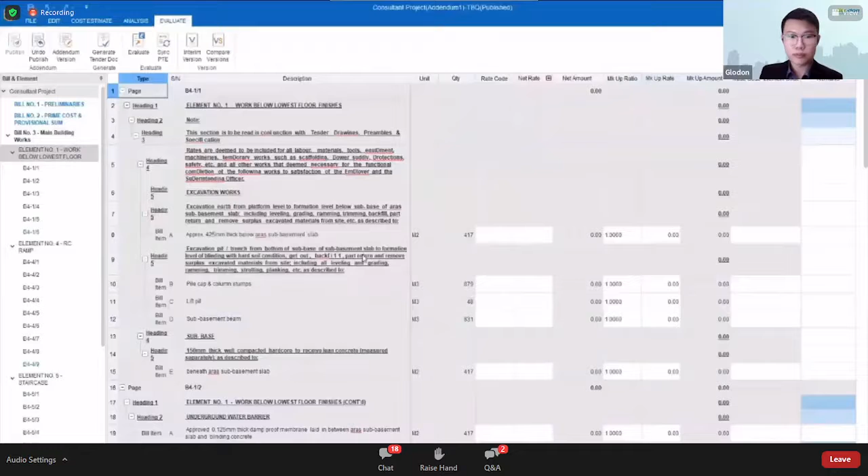Now, let's say as a consultant, you have done your BQ, then you can just publish your BQ, generate this tender document, save your password, and then you can send this to your contractor. Right? So once the contractor has received the TBQ file, they can start to do the e-tendering by using TBQ. Once they have opened it, you can see that the contractors actually cannot change any description here.

They can only key in the prices, or they can also utilize all of the price library or unit rates that they have from the current project or even previous projects and utilize it in the costing stage. So for example, if they want to reuse any of the unit rates from a previous project, they can just copy and then reuse it. You can also click and drag, you can double click. There are many ways to do the costing here actually.

So let's say you have finished, you just click on generate tender submission, you key in all of the file information here and also key in the password. Then once you are done, you can just save the file and you can send it back to the consultant. Then the consultant can proceed with the evaluation.

What if you are a contractor, but you do not have TBQ? If that is the case, you can actually also use our website here, which is called eTender. Then you can just import the file you have received from the consultant and do the costing here. Okay, so you can just import the file. Then you can do the pricing here, like how you do it in TBQ.

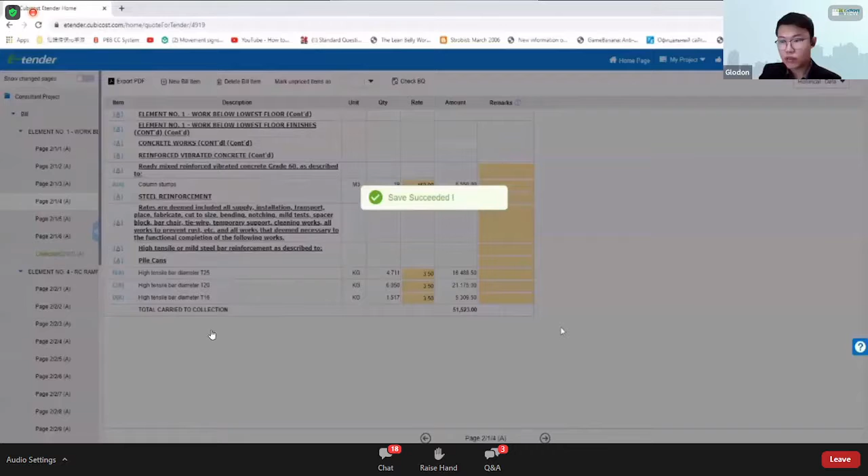But the main difference here is that you cannot use any price library. You cannot use any past projects' unit rates. You cannot use the filter as well. So basically, I would still recommend you to have TBQ as it will improve the overall efficiency. So again, once you have finished the tender, you can just generate your tender submission here, key in all of the information and also the password.

Then from here onwards, the consultants can import all of the tender submissions and do evaluation. From here, consultants can compare all of the tender submissions that they have received. You can see different comparisons here, company 1 and 2, which prices are higher or lower, and we can also further check which specific elements or even bills have higher or lower prices.

So everything is shown clearly, even with the graph here, to show you what percentage each element or bill has taken up. So that is basically it for TBQ.

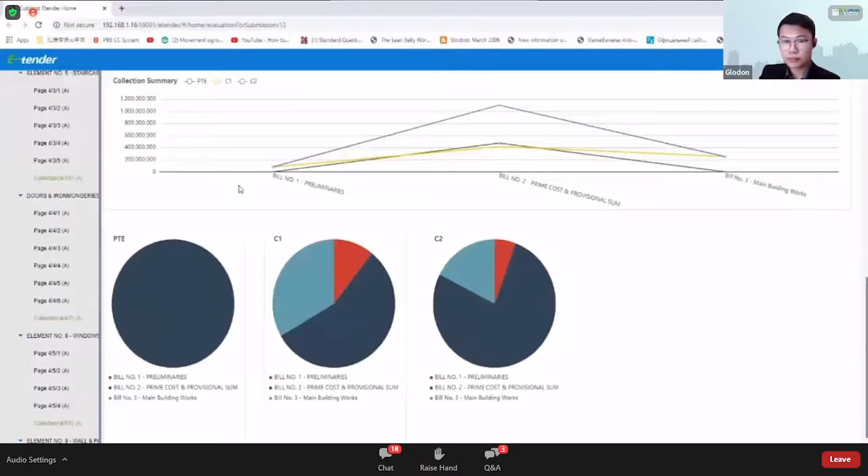Now, this function here is called segmentation. Segmentation here allows us to choose between construction zone, subcontracting, progress claim, and even custom. Here, we are going to choose progress claim. And under the progress claim here, we can choose the calculation scope. Then we can just select the area of our completed model.

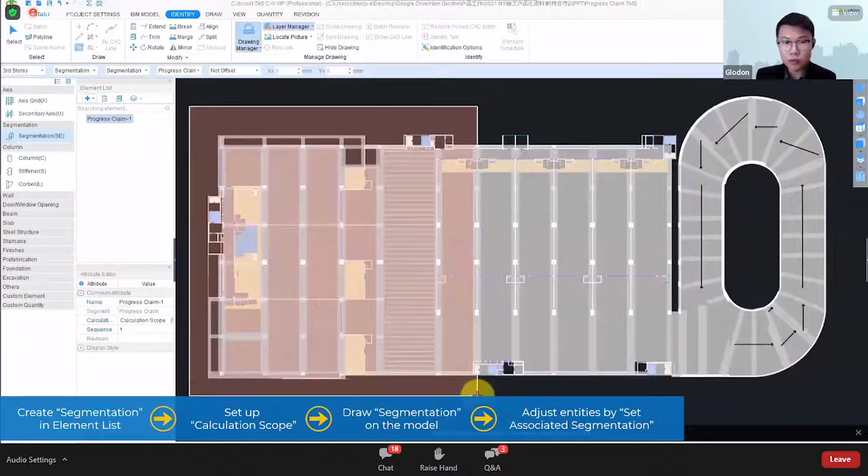Then we can just proceed to set the associated segmentation. For example, these columns are in between the area, so we can set whether they are part or not part of the segmentation. Then we can continue to click calculate. Once the calculation has been completed, we can just go to our report or just view from this area and check on the quantities. So please keep in mind the quantities that we have selected here are solely based on the areas or the segmentation that we have selected.

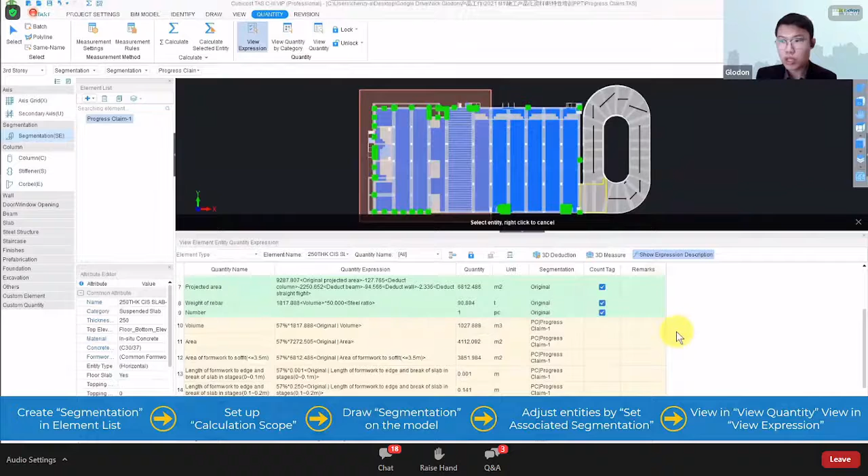So from here, we have selected the progress claim. You can see it is categorized under progress claim number 1. You can also see all of the summary of the quantities based on this segmentation.

Now, the next part is about set associated segmentation optimization. This basically allows us to clearly set the quantities, whether we just want formwork or we just want concrete, based on different types of progress claim. So let us have a look on how it is done.

Firstly, we can do the same, choose our progress claim. And now we are going to choose to define calculation scope, and then we can import the drawing which we have highlighted after we have visited our construction site. Okay, so this is a PDF drawing that we have highlighted based on our construction site.

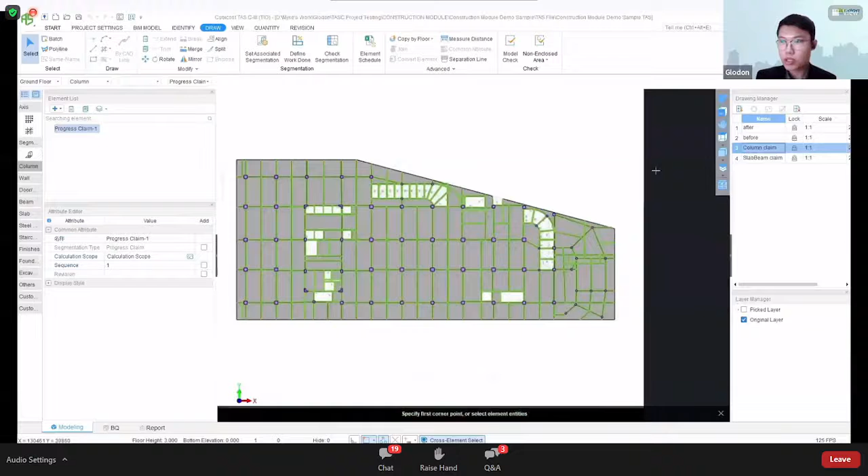Now, once we have imported the drawing, we can switch off all of the non-related entities, so only the columns are left. Then we can select the areas based on the highlighted drawing. Then from here, we're going to choose both formwork and concrete for this progress claim 1. And for the next area, for the columns, maybe we can just choose only formwork.

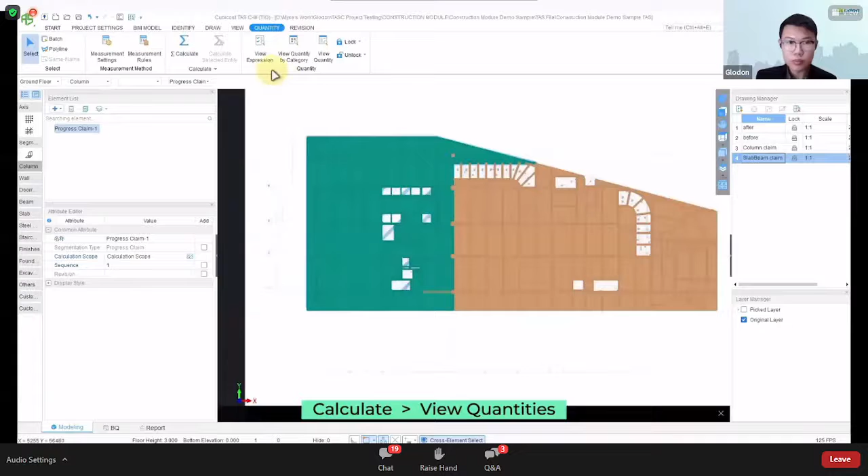Okay, so then we can continue the same steps for beam and also slab. Choose the areas that you want, choose the quantities that you want to set. Then you can calculate again and then view the quantities. So from here, you can try to view the expression or the quantities. Once you have clicked on the area, you can see here, the selected slab only contains the quantities which we have set with the segmentation.

So here we are going to create another progress claim, but this one is progress claim number 2, and we will include the rest of the quantities. And now we are going to view the quantities again. And here you can clearly see the quantities for progress claim number 1, progress claim number 2, and whether they are just for concrete or formwork or even both. Then here we will try to view from report. So as you can see from here, we also can see progress claim number 1 and 2.

So the next one will be about define work done. Define work done is basically for vertical elements such as walls or even columns, because sometimes when we have a very large project, for example, a very tall column, maybe you are going to cast the concrete 2 times. The first progress claim will be maybe 50%, and then the second progress claim will be the remaining 50%, and so on. We can also utilize the segmentation to define the work done as well. So let us have a look.

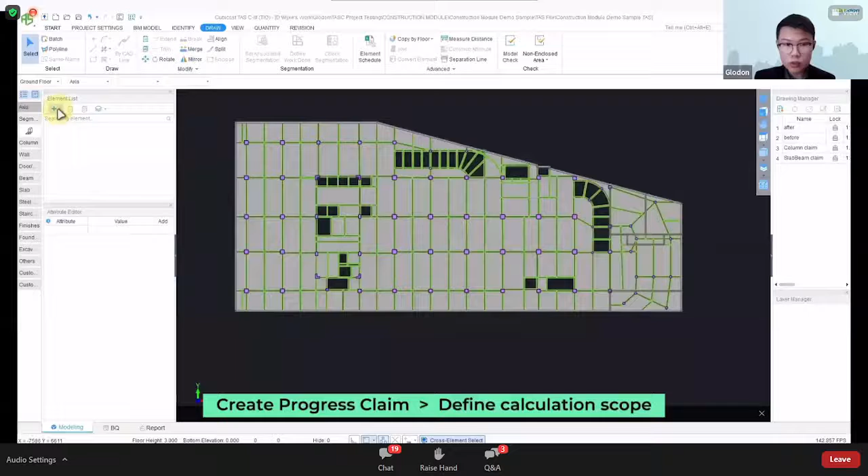First, we can also create the progress claim first, and then we select the calculation scope. So from here, we will only select, let's say, columns and walls. And we will select the columns that we want. And this one will be under progress claim number 1 or 2. We can choose from here, and we can choose how many percent has been done. So this progress claim is 100%, and we will choose this one as 30%. And then we will just repeat the steps until we have done all of the columns.

And then we can proceed with progress claim number 2. And once we click on define work done, we can choose to have the remaining percentage. For example, the first is 30%, so the remaining is 70%. If we try to enter a value that exceeds 100%, it will give us an error. So we just need to complete all of these. Then we can view our quantities.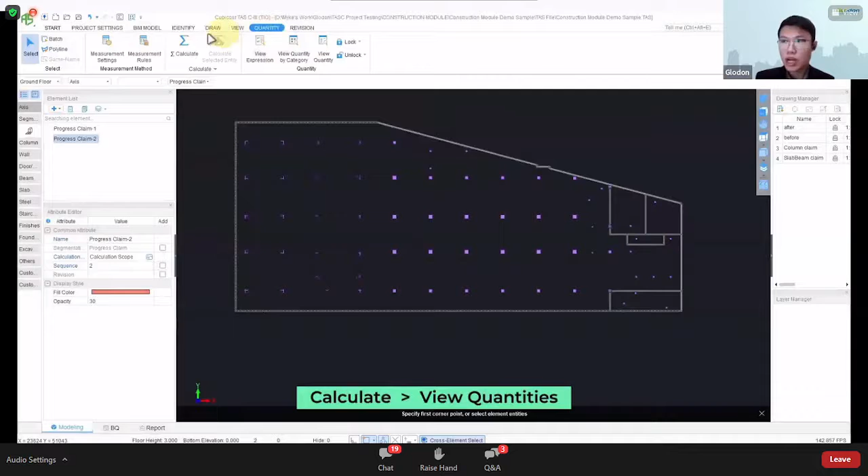And from here, you can clearly see our 3D model and how the defined quantities are done. So let's try to view the quantities right here. This column right here is claimed 100% in progress claim number 1. And then this column right here is claimed 30% in progress claim number 1, and the remaining in progress claim number 2.

Now, let's have a look at check segmentation. Check segmentation allows us to get an overall picture or save the screenshot to whoever we want to send it to as a proof for when we are trying to apply for the progress claim.

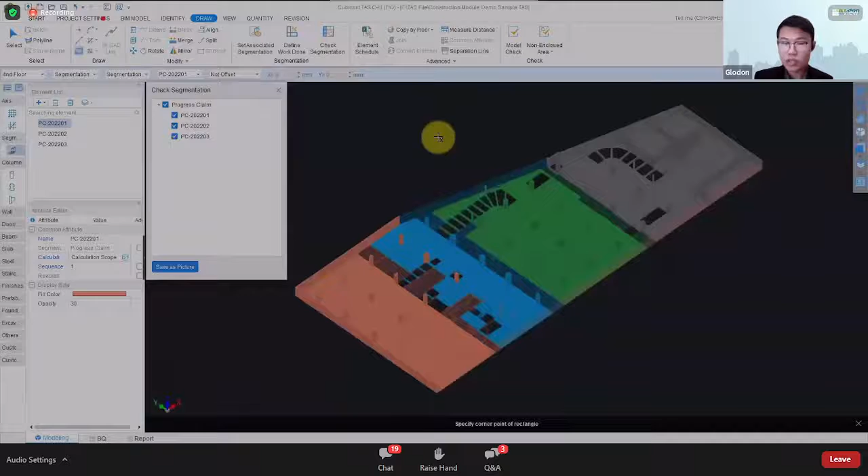So for check segmentation, you can choose all of the progress claim here, and it will show the model in 3D, separate the colors accordingly, and then we can further save the screenshot as high definition JPEG format. So we can do it like this. Then you can just save it, and then we can further send the file to our manager or client or whoever.

Now, the next function will be about revision. We do understand that in construction stage, there are a lot of variation orders, or we call it revision. So whenever you receive new drawings, you will need to find out where those changes are. So those are very hectic. So in our software, how do we solve this problem?

So from here, we have before and after drawing. And right now, we are going to compare both of these drawings to find out where the changes are. So the software will do this automatically for us. Here you can see we have green, red, and gray color items. Basically, red stands for deleted items, green for added items, and gray for unchanged items.

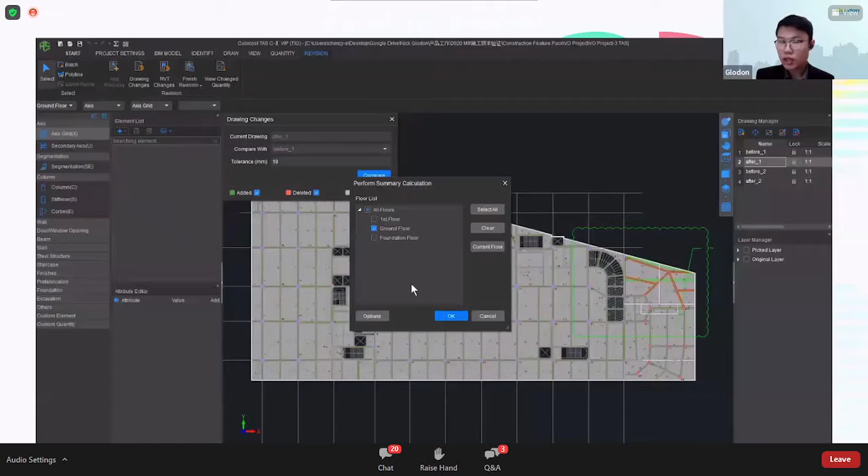Once we know where those changes are, we can tell the software, okay, we are going to add a revision, and then we are just going to calculate the model once, and we are going to change or model our project based on the revision drawing. So let's say that these objects are to be deleted, and then we are going to add those elements that are from the new drawing. So let's say we're going to add the beam right here.

Then we are also going to add the slabs. Then we are going to add the slabs here as well. And once we have done the revision model, we are going to tell the software, okay, we are done with the revision. Then we can try to calculate the model again.

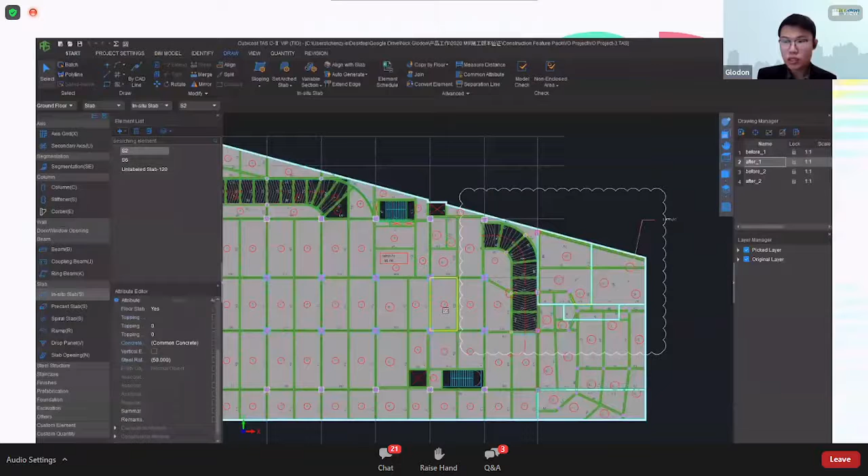So from here, we can view the change quantity, and it will clearly show us before revision, after revision, and also what the total changes are. So we can clearly see the differences from here. So next, we can also try to check individual quantities by just clicking or selecting those items. Then it will show us whether they are from revision number 1 or whether they are from the original model.

Here we can also try to search where the changes are for all of the entities. Let's say for V1. So we can easily check all of the changes that have been done.

Next is about CubiCost Cloud. For the past, I think, around 2 years since the pandemic started, a lot of people have started to work from home. CubiCost Cloud serves the purpose for us to upload all of our projects into the cloud platform in order for us to share all of this information, whether to our clients, manager, or our colleagues.

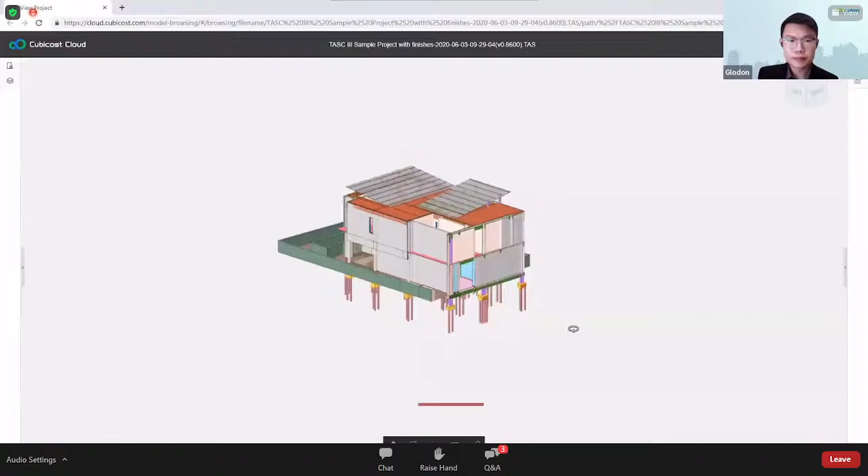So basically what you can see here is like how we can view in the TAS software. You can either view by different zones, different floors, or you can even view by different elements. Then we can also rotate the 3D model like we did in TAS. And the next part is about the tools at the bottom here. We can view the model section. This will be very useful when you are at the construction site.

And we can also click on individual entities and check the attribute editor or maybe their quantities as well. So following, we can also view the quantity and also the expression, the volume, the area of formwork, etc. Of course, we can also double check the quantity report for each and every element.

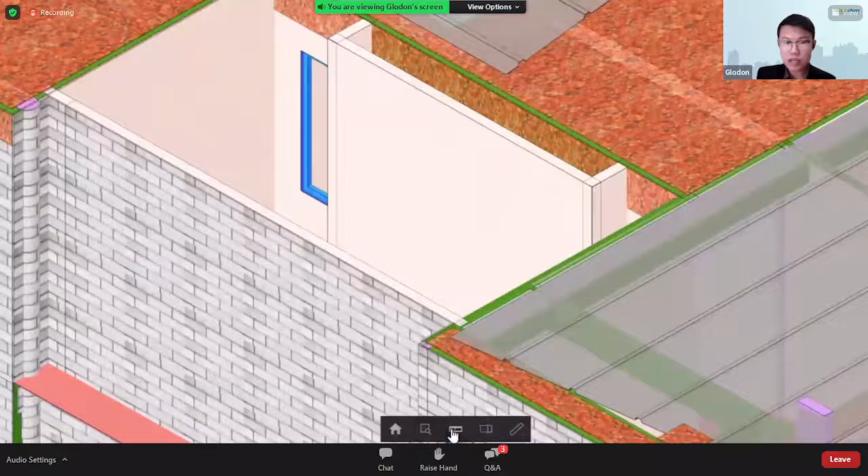So the next part is about how we can utilize some of the other tools in CubiCost Cloud. So in CubiCost Cloud, we have a tool for us to quickly measure the distance between one location and another. For example, this wall, how long it is. And then we can also leave a comment. Let's say I'm going to select this wall and I'm going to put an arrow and I'm going to leave a comment.

So let's say, please check. Then you just click on OK. And the comment will be saved. So anyone who has access to this CubiCost Cloud file can open it and view all of the changes or the remarks immediately. So we are going to leave another comment on this section.

Then whoever has access can just click on those comments and it will open up the screenshot, and we can view where those changes or remarks are. So that is basically for CubiCost Cloud.

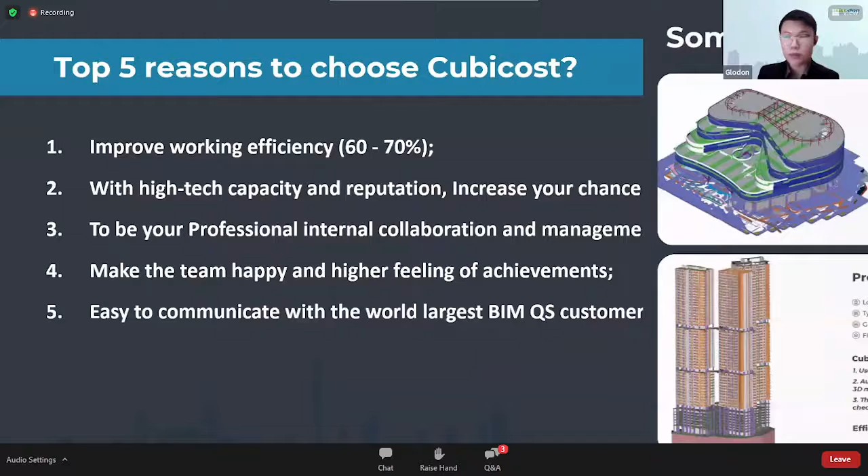Here are some of the typical projects that we have from our existing clients. You can see that no matter how big, different in shape or unique the building is, we can set up or create all of these in 3D. So we can see that the efficiency improvement stated by our clients is up to 60 or even 70-something %. Why not join us in this 5D BIM journey to have not just intelligence, but also visualization and interconnection.

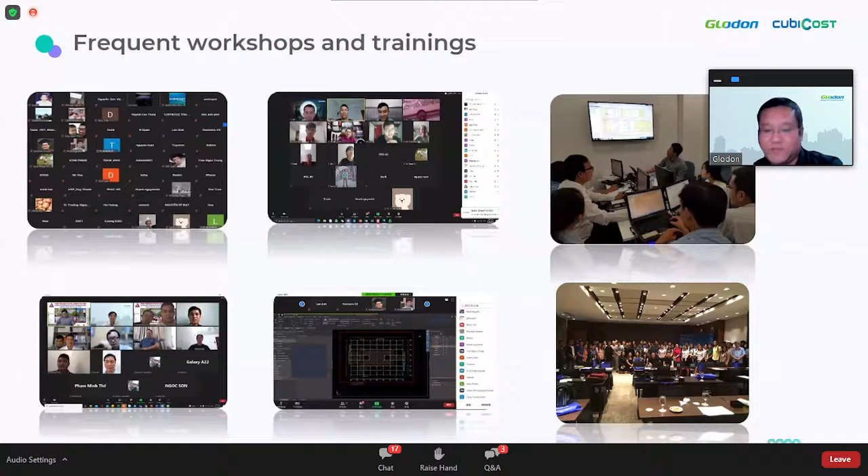Here are some photos of our workshops and training programs. In fact, every day we have many of these programs going on. So in summary, we have 4 platforms for our learning practice, and we also have Glodon team and our local partners. In different countries, we have different partners, service partners, sales partners. Together, we can make sure we deliver excellent service to all our users.

And today, as we know, Glodon is an AEC software provider, and CubiCost is just one solution from Glodon. In fact, nowadays Glodon has more than 100 different products, including design software, QS software, and maintenance software. So more toolkits are developed together with CubiCost. These are 3 free tools that we provide for quantity surveyors together with CubiCost. We can check them one by one.

The first one is Revit Viewer. You can open a Revit model and have a look. The second one goes deeper. It's like the functions in TSC, comparing the difference between 2 drawings. The third is PDF converter. Maybe you will say, okay, if I search online, I can find a lot of PDF converters, PDF to Word. But in fact, ours can convert PDF or pictures into Excel.